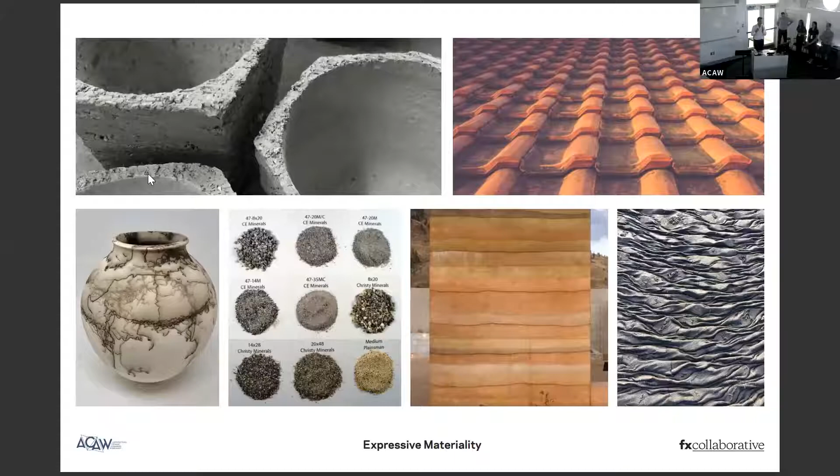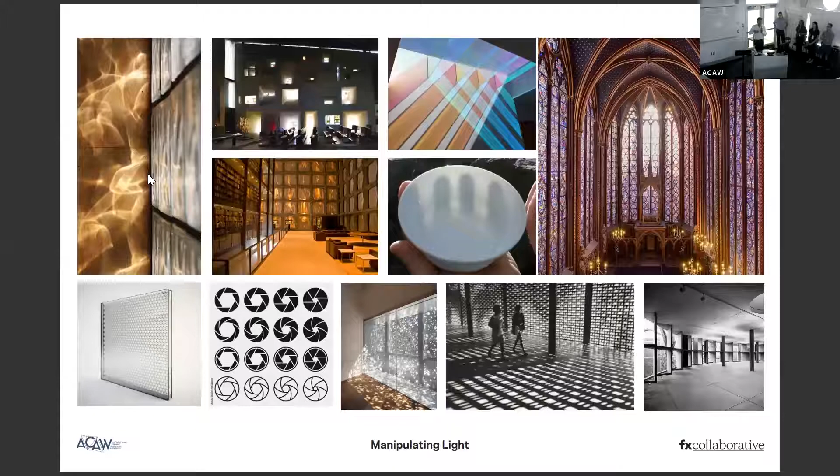On the one hand, the expressive materiality: how can we take a terracotta panel that sometimes can become very flat, which I'm sure the Boston Valley people here will say is a good thing, and consistent, but we wanted to really dial up the expression of the clay itself and pair that with this notion of manipulating light and the ability that you see in a lot of modern terracotta interpretations to do solar control. But in this case, we wanted to see how we could take the material and use it to evolve and transform light. So that turned into permeable solids.

Permeable solids really leverages that rich materiality and craft of terracotta and creates this tension between opaque and transparent, dark and light. You'll see there are these sculpted forms that are both apertures and reflectors, and that create a solar responsive terracotta cladding system. And that really advocates and creates a design that is a more expressive solid surface in building design. Erica?

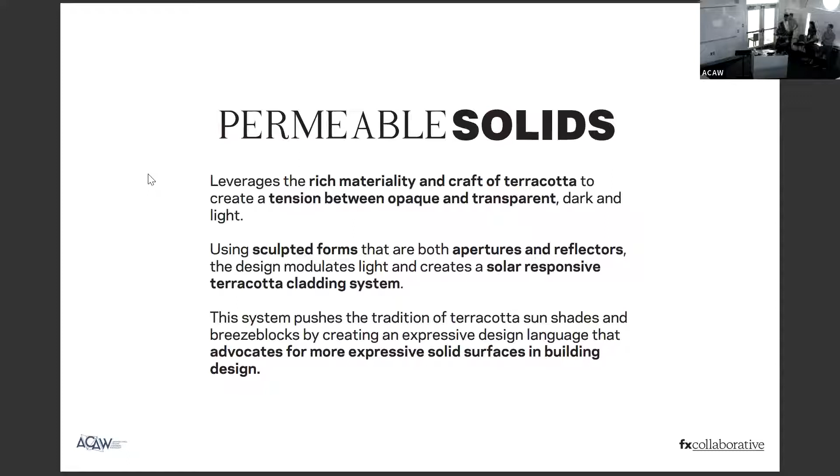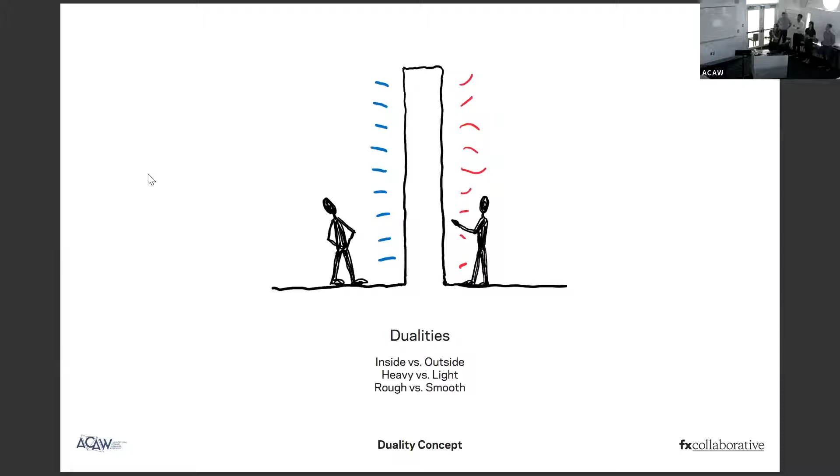All right, so with these larger areas of interest in mind, we developed 5 guiding concepts to really help focus our design process. So first, we have this idea of dualities. We wanted to create a screen that was really two-sided and that could provide 2 kind of opposing experiences on either end. We also wanted to manipulate light. We wanted to be able to let light into a space, but really transform it from something that was more direct and harsh to something that was more diffuse and soft.

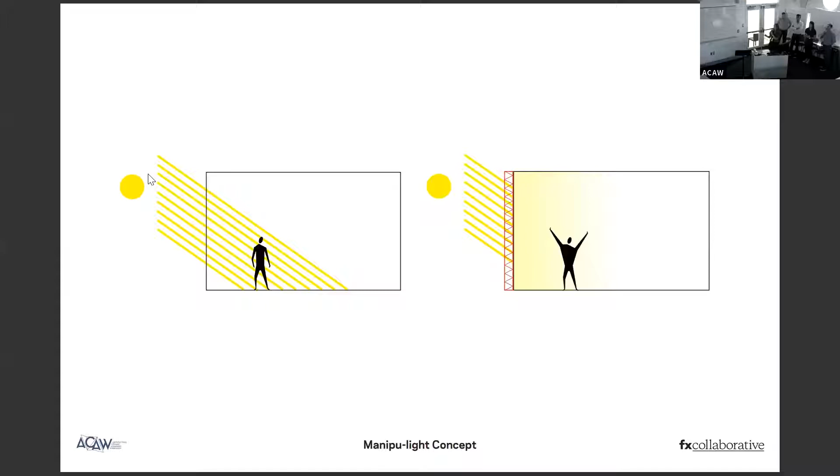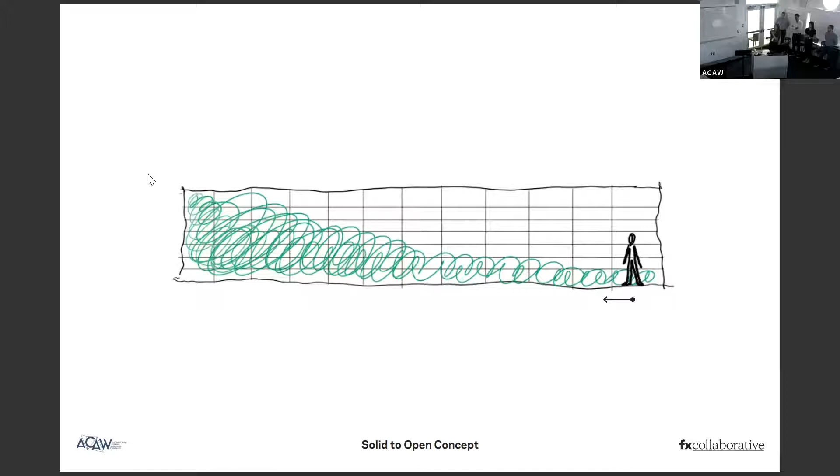Solid to open: we wanted to be able to apply this to an exterior. So we thought it would be important to account for open, semi-open, and closed conditions and find a way to translate those in a really smooth, gradual way. Solar orientation: we thought the system should adapt to different light directions and different intensities. And finally, we wanted to make something that was modular, easy to repeat, and really celebrated the natural texture of terracotta, the richness, but also leverage the glaze to reflect light into a space.

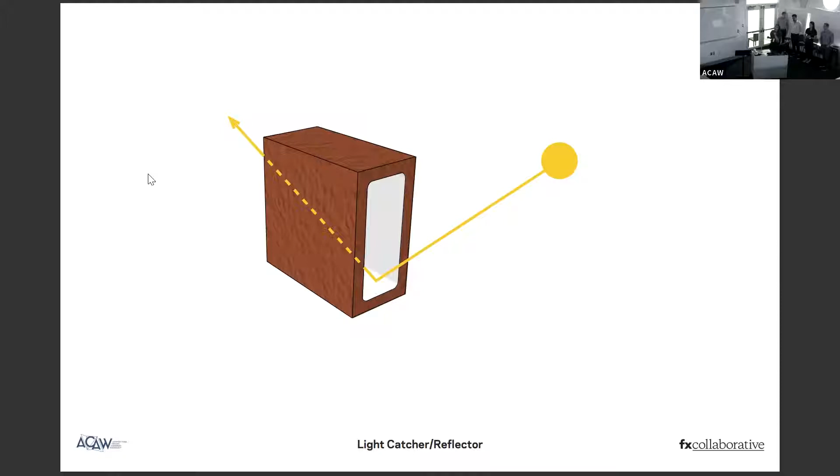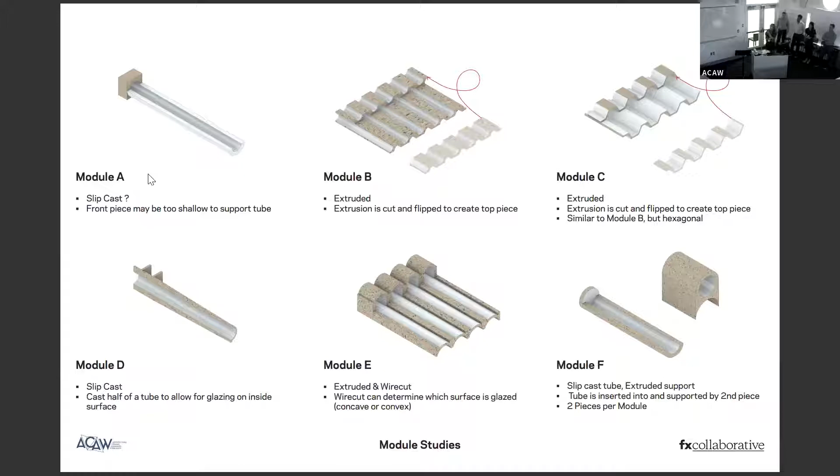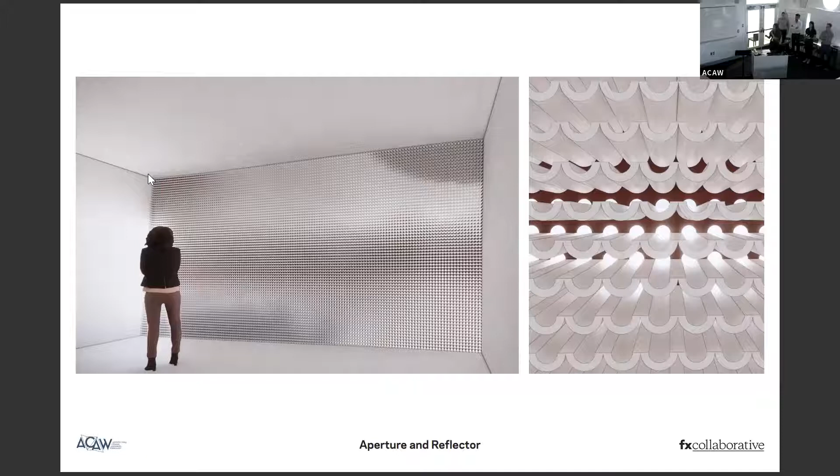So when we started developing these modules, we thought of it as really a 2-part system. One where we'd have these apertures that would capture light on one end, and then these tubes that would really transform light and reflect it in on the other end. And we looked at the system in a number of different shapes and scales, always thinking that when they would be aggregated, we could get an effect similar to this aspirational image, something that glows, something that feels soft, almost cloud-like in a space.

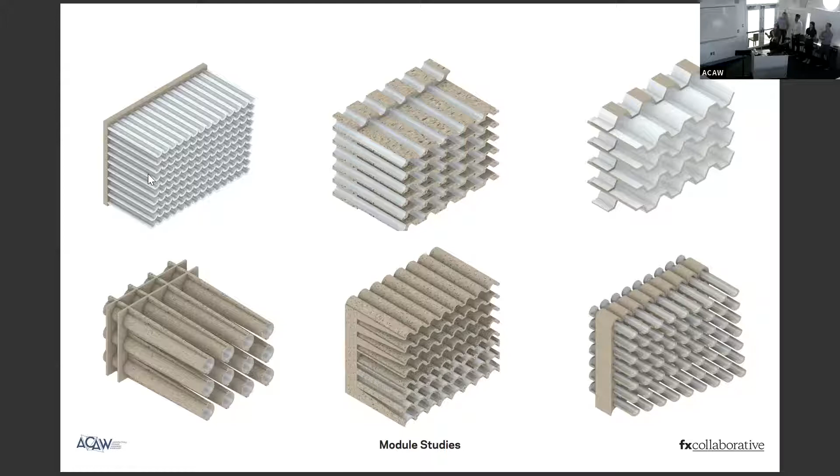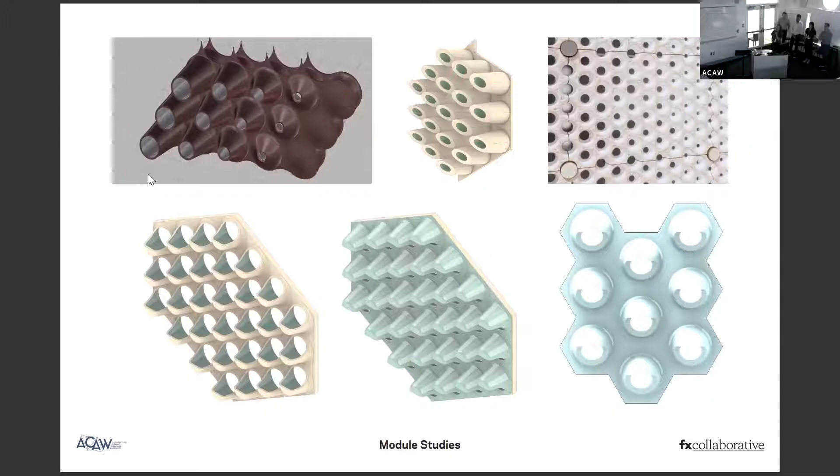So with that design intent in mind, we continued to look at different systems for aggregating, different ways to produce these modules. And we had this really important shift in our process, where we went from thinking about these modules as stacked extrusions that would be self-supporting to thinking about them as hung ram pressed panels. So by detaching the structural system from the ceramic system, we were really able to tune these panels, make them lighter, make them thinner, so that they would be able to transmit and transform light similar to our design intent.

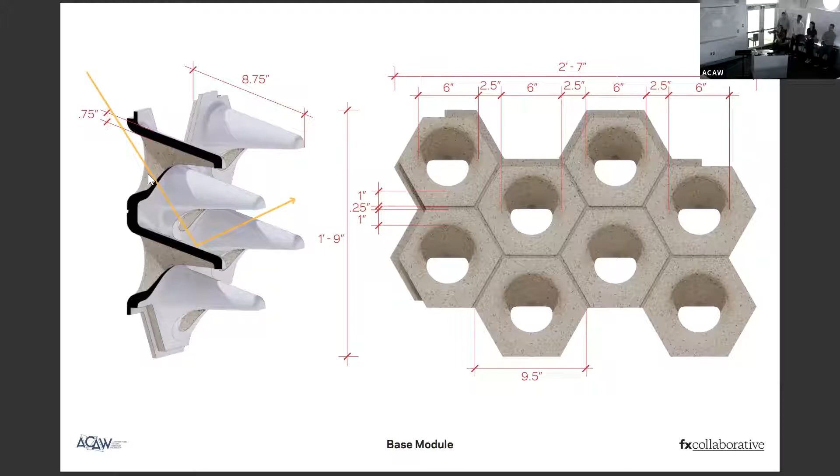So our final terracotta module was carefully crafted to respect the constraints of the ram press process. And at the same time, we wanted to create these consistent and dense openings so that we could get light into the space. We also thought about the angle of the cones and how the light could come in, bounce off the cone beneath, and then be reflected back into the space.

So once we figured out the effect, we wanted to test this in reality as sort of proof of concept. So we did a series of 3D prints. This one was a scaled model of a couple of modules ganged up to create a bit of a field. And we had it two-toned to try to imitate what would eventually become the natural terracotta and then the glazed side. And you can see that the light effect, where the light is coming in from the cone above and hitting the tip of the cone below, is happening.

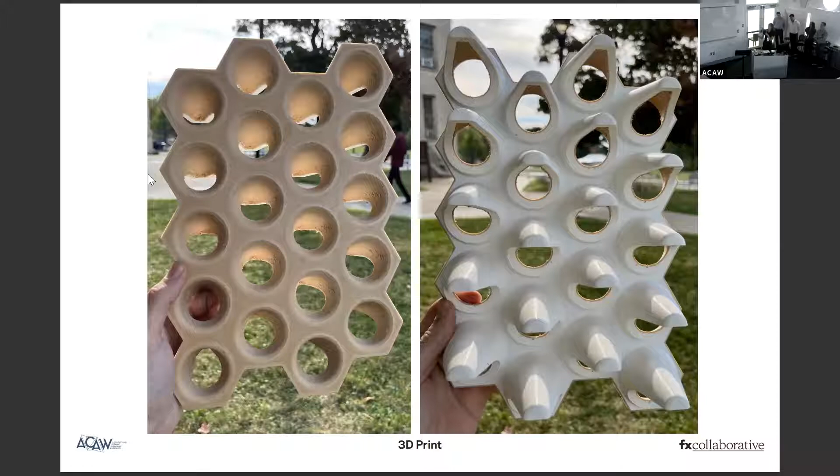We also did a one-to-one study of a cone with some glaze samples below to really look at that spot where the glaze would be most illuminated and see how that angle really affects how we view that glaze.

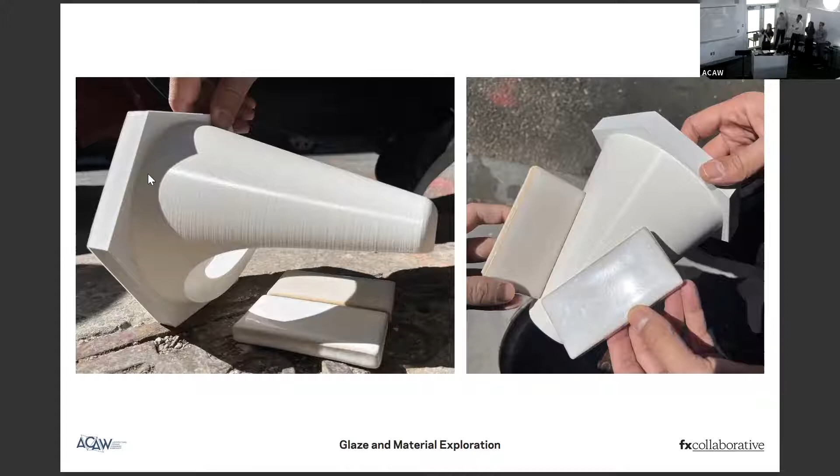And we did some materiality studies on the natural side of the terracotta as well, the unglazed side. Again, we really wanted it to have depth. We didn't want it to be flat. We wanted it to be rich and really embrace the roughness. So we looked at adding different colors of grog, sawdust, different additives. And then for the glaze side, looking at glazes with different hints of color and runniness to really see which glaze would be the most illuminated on the cone side.

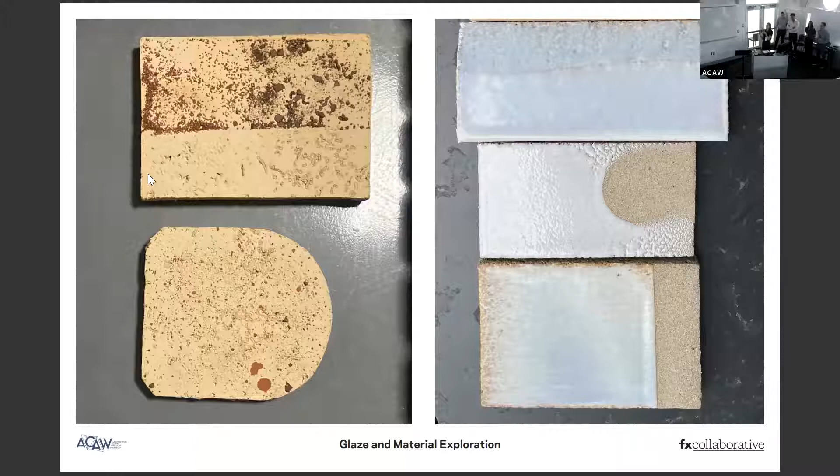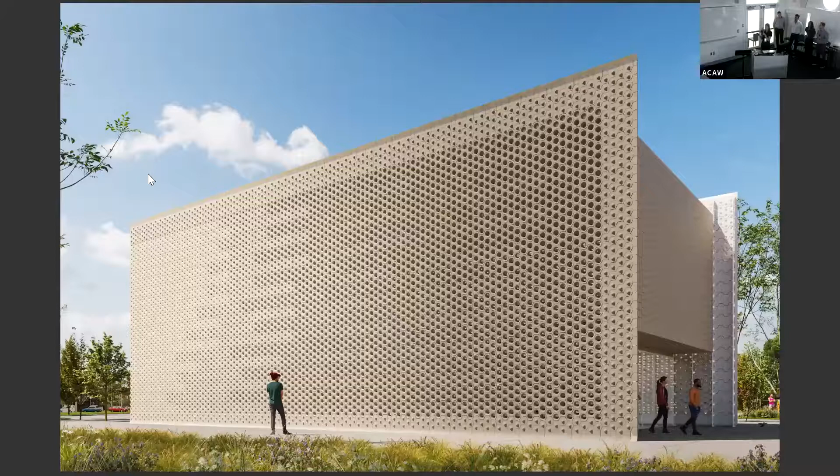And as we were refining our materials, we were also looking at a larger application of these panels on like a building scale or a pavilion. So looking at end conditions as well as bringing it back to one of the earlier concepts of an open to solid facade, parts of the building wanting to be more solid, some wanting to be more open.

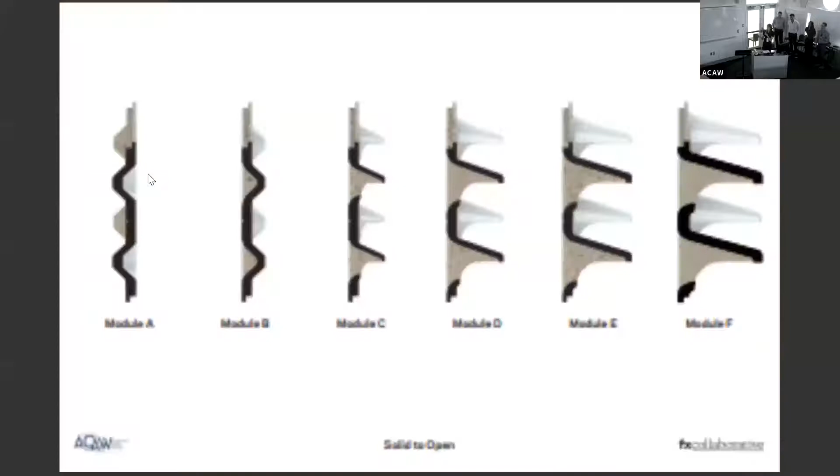And so we developed a series of panels based on the same module that would move from something very open and with deeper cones to something that was flatter and more dimpled but wasn't open, and carrying that hexagonal joint all the way across to allow it to read as a singular field, even though they're a series of modules. So you can see the cone shrinks and starts to become more shallow until the last two modules where it's totally closed.

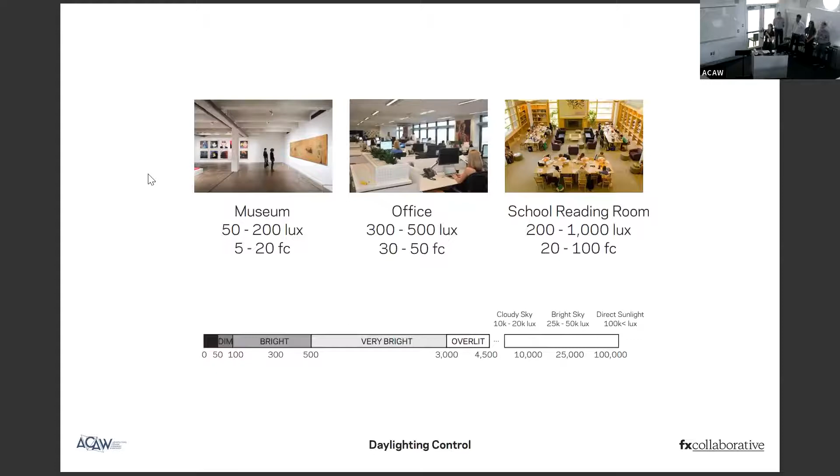We also started thinking about the different kinds of light, diffuse, direct, and then the different amounts of light that are required for different programs. So a museum, an office, and a reading room wanting different amounts of light, and how that might be able to be achieved by flipping the orientation and the wire cut operation of the slice. So an undercut module allowing a lot less direct light in. And in this way, we're able to control amount of light, kind of light, and the view.

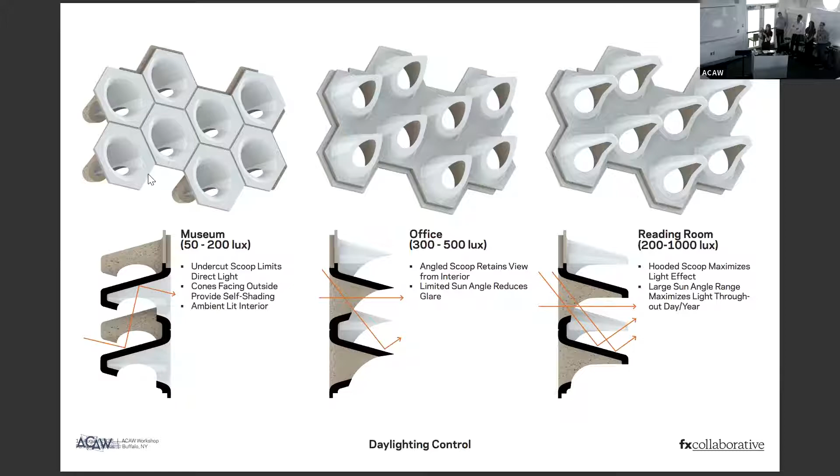And through a mix of those wire cutting operations and the fade, we're able to achieve a much softer, diffuse light, so that we can bring light into the facade without it being as harsh.

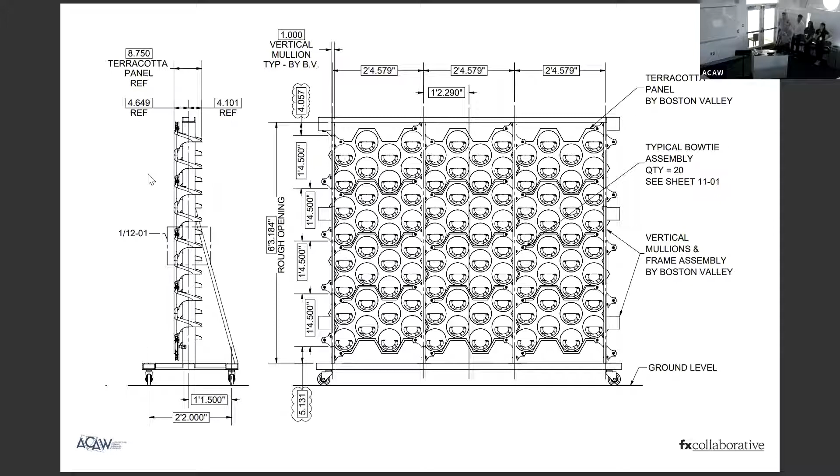Thank you. So to develop the terracotta modules, when we made that distinction between ground-based and being hung, we had to develop a structure. So working with Forest Consulting and Tri-Pyramid, we developed a steel frame, a simple steel frame that's made out of 1x4 solid members. And this is important because it allowed the structure to sit vertically between the cones and also close enough. On the image on the left, you can see that by having the steel close to the cones, it doesn't interfere with the lighting conditions that we were trying to achieve.

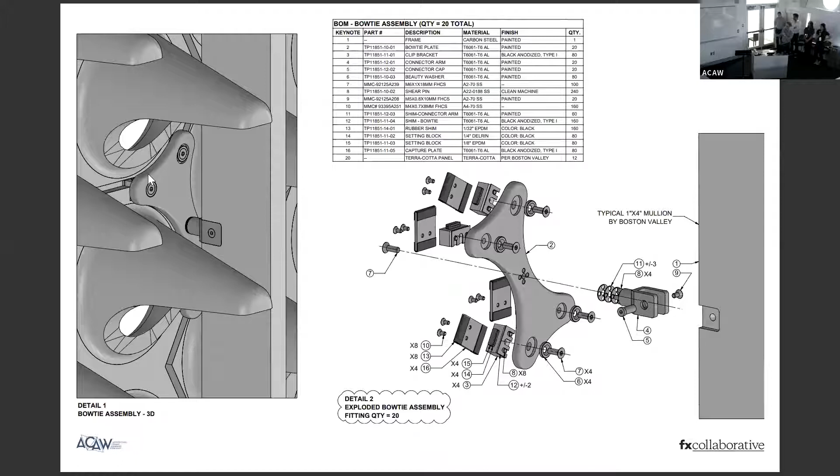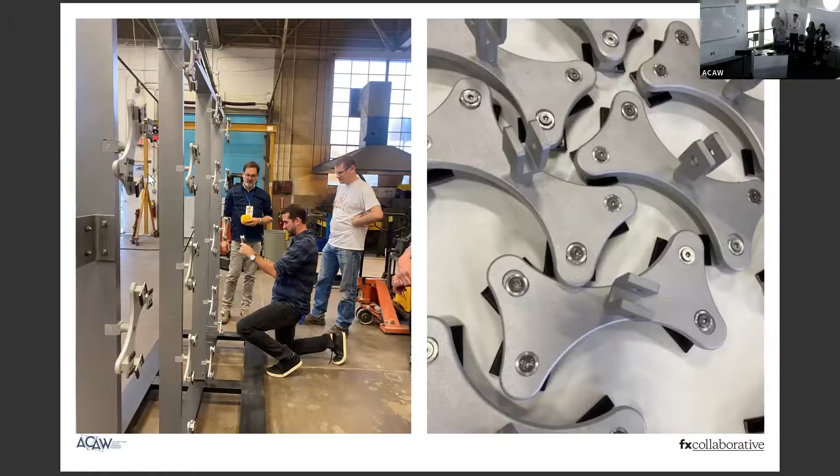And on the right, affectionately, what we call the bow tie is our connection piece between the steel and the terracotta. It's a natural concave shape that's developed out of the cones in the area and has 2 dead load anchors and 2 lateral anchors that hold the panel in position. So you can see from our install here, it's a fairly precise piece of engineering. Being an aluminum milled piece on a steel frame, it's naturally different from the terracotta process.

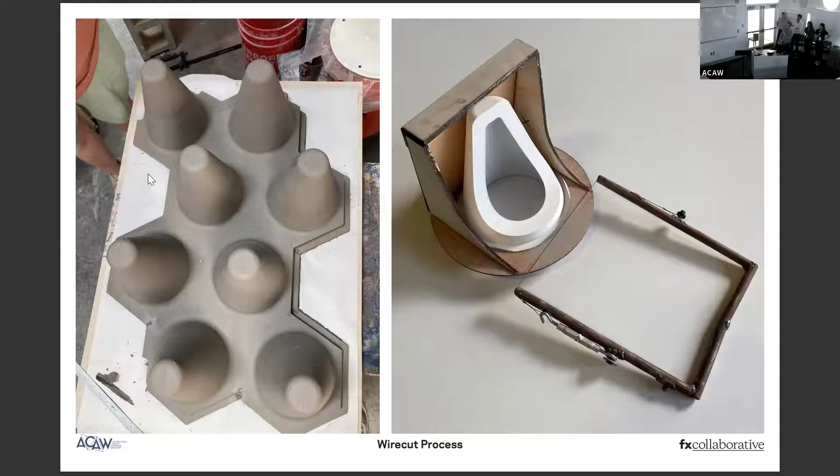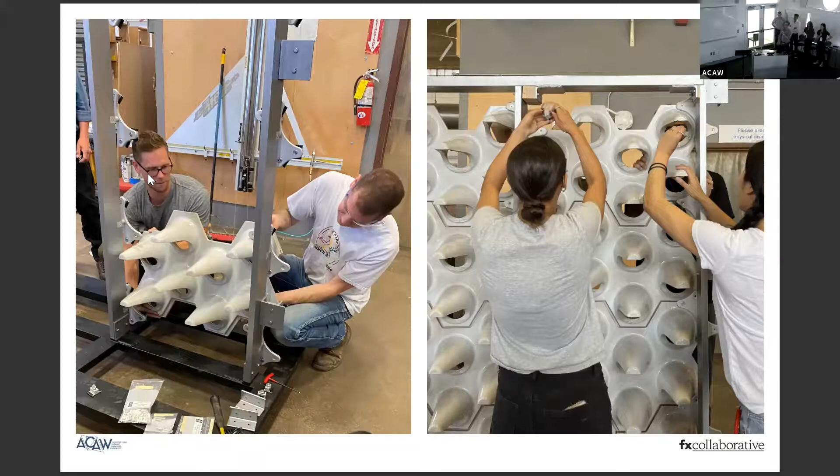We really wanted to embrace the handcraft. You can see on the left our ram pressed piece without the cuts, and on the right, a jig that Andy Brayman put together to actually cut out our cones. So the two are slightly different in nature. And when we assembled things, we learned that the challenges we thought we'd have were evident, but we were able to overcome them. We engineered some tolerances, and through some adjustments in the field, we managed to get to our final product, which we're really happy with.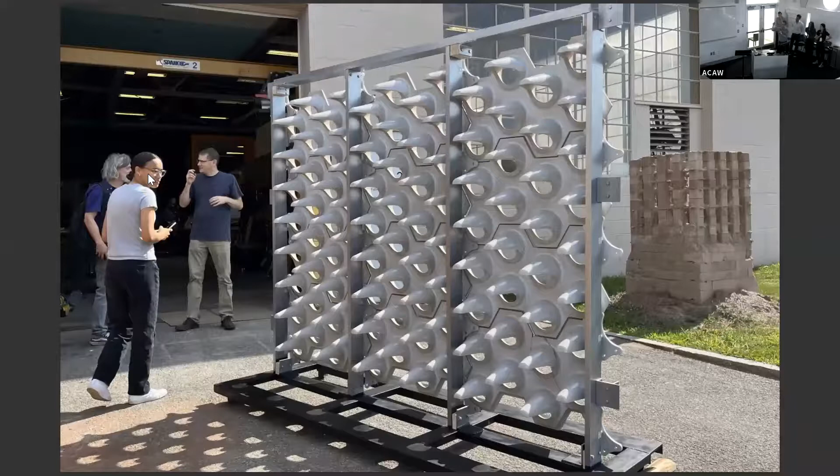So this is the exterior view, the unfinished terracotta. Really happy with the way that the light models it from the exterior, the jointing and the flatness of that versus the duality of the interior, where, as has been described, the lighting coming through the apertures, bouncing off the reflectors, really illuminates that interior.

Something a little bit unexpected was the play of shadow at the ground level. You can see the tip of the cone cutting out to create that crescent shadow shape. And up close, you can really start to see the subtlety of the surface from horizontal to vertical and the thinness of the clay, which we really liked. And from the inside, you get a play of unfinished terracotta and the upper cones kind of peeking through.

We've had a great time here at ACAW. We've learned a lot, and we really look forward to finding an application for this work. Thank you.